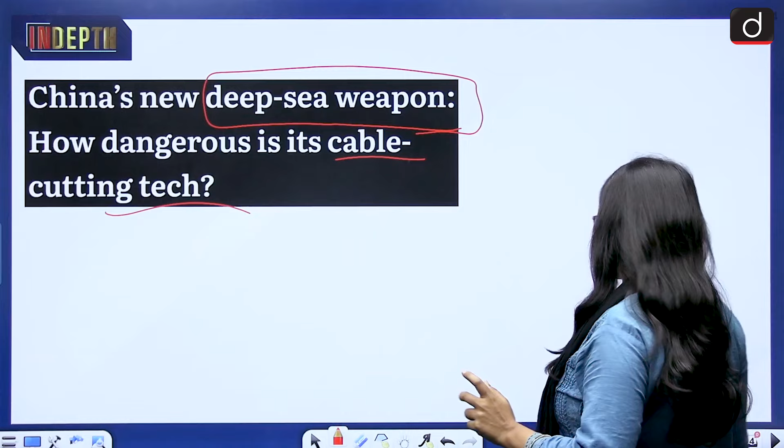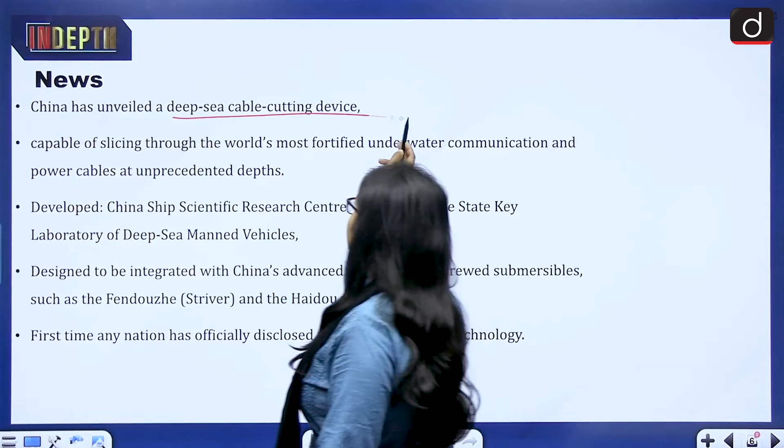News talks about China's new deep sea weapon, how dangerous its cable cutting technology is. So cable here does not mean normal cables, it means the cables which are lying deep under the sea, the deep sea cables, and this is how they look under the sea. So the news talks about China has unveiled a deep sea cable cutting device, which is capable of slicing through the world's most fortified underwater communication and power cables at unprecedented depths. And this unprecedented depth is around 2000 meters.

But this unique technology developed by China for cutting deep sea cables can work at a depth of around 4000 meters, which makes it even more deadly. The new technology has been developed by the China Ship Scientific Research Center and the State Key Laboratory of Deep Sea Manned Vehicles. It is designed to be integrated with China's advanced crewed and uncrewed submersibles, the submersibles which work at a great depth.

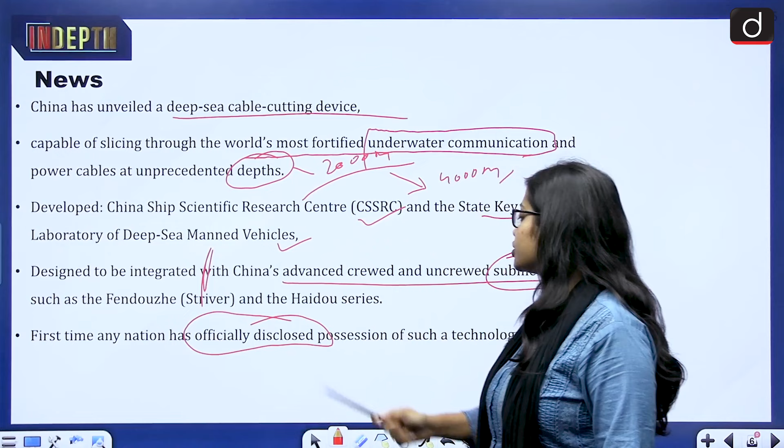Then this is the first time any nation has officially disclosed possession of such a technology. Now what can be asked in the examination is that China has become the first country to be able to develop the deep sea cable cutter. Also, you should know what are optical cables or optical fibers, from where the question can be asked in the examination.

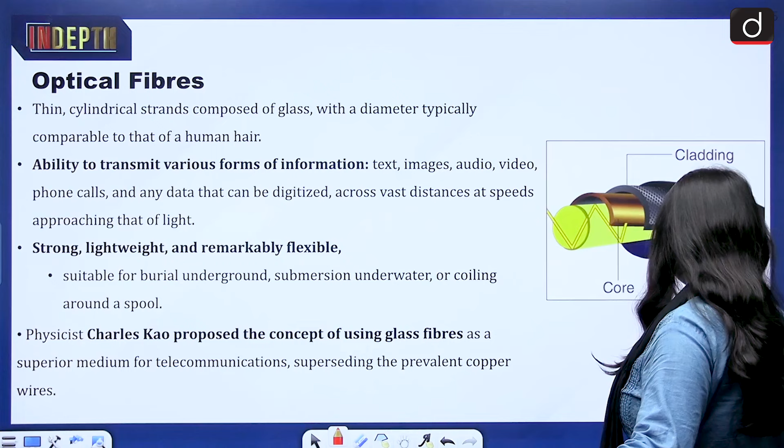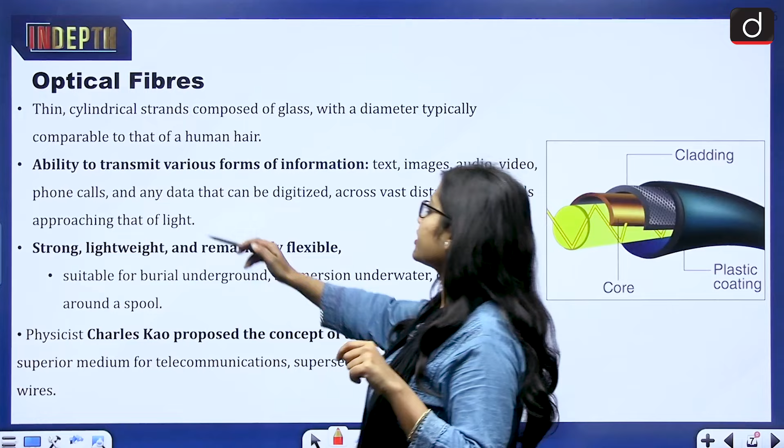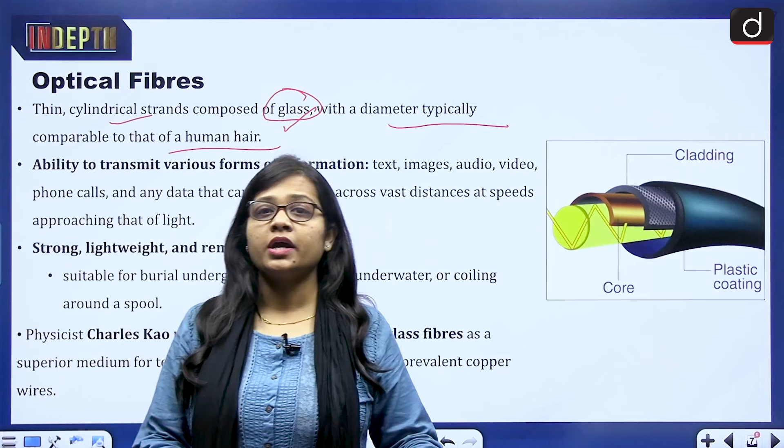Now what are optical fibers? Basically optical fibers are the element of which these deep sea cables are made. Optical fibers are very thin, cylindrical in nature, composed of glass with a diameter typically comparable to that of a human hair. It is very durable, and one of the benefits is that information can travel through it at a very high speed, like the speed of light, and the interference is very low because it is composed of glass, and glass is an insulator, so the chances of it getting damaged or electrified are very less. And look at this image, this is how our optical fiber looks.

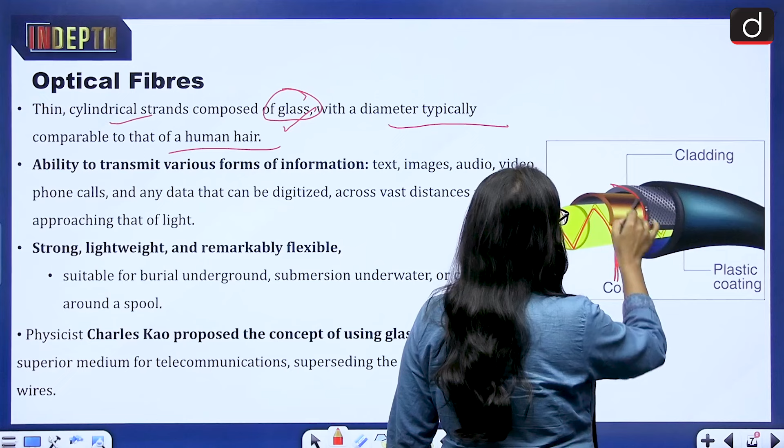This is the light which is traveling under it, then this is the core which is basically made up of glass, then you have a coating which is known as cladding, and then you have a coating outside it also, and it is very very safe in nature also. So it is thin, cylindrical, composed of glass, diameter comparable to that of a human hair.

Then it has the ability to transmit various forms of information. So various forms of information can travel through it. Information in the form of text, images, audio, video, phone calls, and any data that can be digitized across vast distances at speed like that of the speed of light. And that is why the optical fibers are so important.

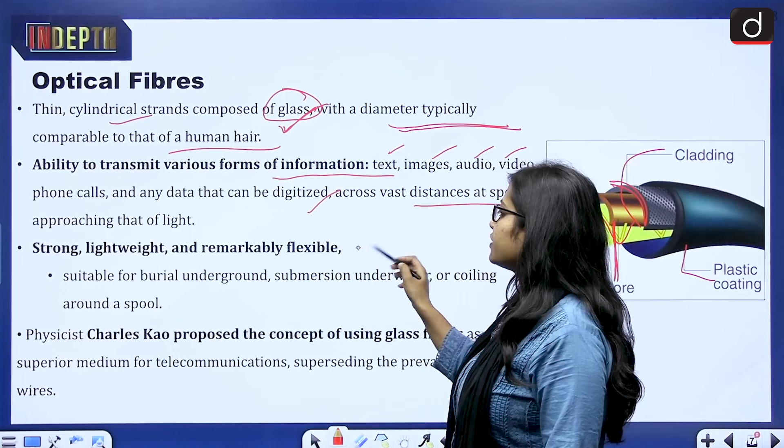And the information or the data transmission which takes place from one place to another place and across the continent also, more and more data transmission nowadays is being done through the optical fiber because of its high efficiency, low interference rate, and also the speed is very, very high. Then it is strong, lightweight, and very flexible in nature, very much suitable for underground, submersible, underwater, or coiling around a spool. So very, very safe also.

And the concept of the optical fiber or the glass fiber goes to physicist Charles Kao. So physicist Charles Kao proposed the concept of using a glass fiber as a superior medium for telecommunication from one place to another place. And for the proposal of using the glass fibers, he has won the Nobel Prize in Physics.

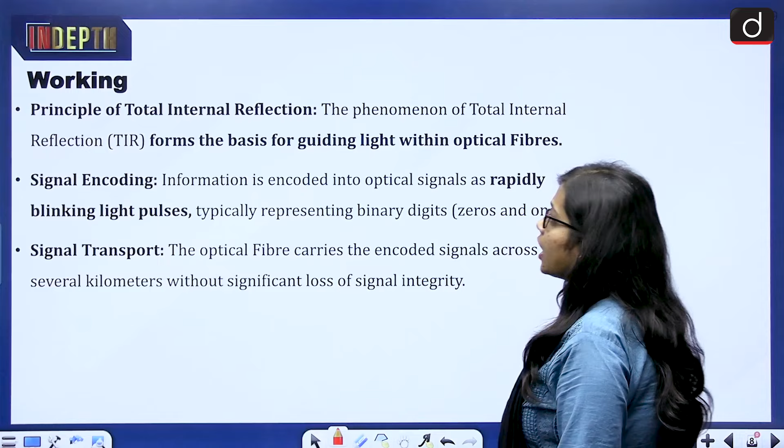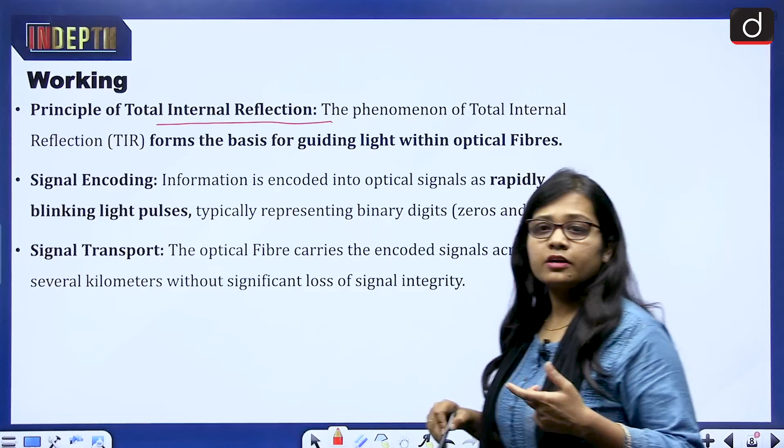Now how the optical fiber works, what is the principle on which the optical fiber works? So first and foremost, it is the principle of total internal reflection. So the phenomenon of total internal reflection forms the basis for guiding light within optical fibers. And when the light travels from a higher refractive index medium, like for example from the glass, to the lower refractive index medium, like for example the air, the light does not go out from the medium, it gets reflected back into the medium, and that is how the total internal reflection phenomenon works.

Then signal encoding. So the information is encoded into optical signals as rapidly blinking light pulses, typically representing binary digits. So the information, like for example, this is the first place and this is the second place. So from the first place, the message or the data can be encoded and then it travels towards the destination, and then here it can be decoded.

Then third is the signal transport. So the optical fiber carries the encoded signals across several kilometers without significant loss of signal integrity. This is in the form of high efficiency, high speed, low interference, because of the nature of the optical fiber.

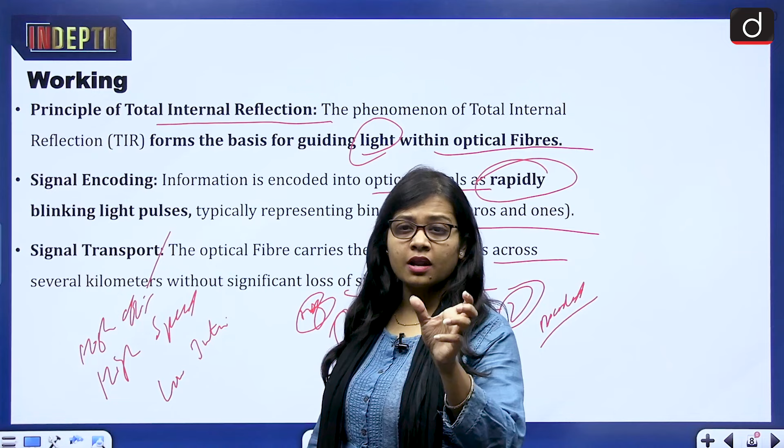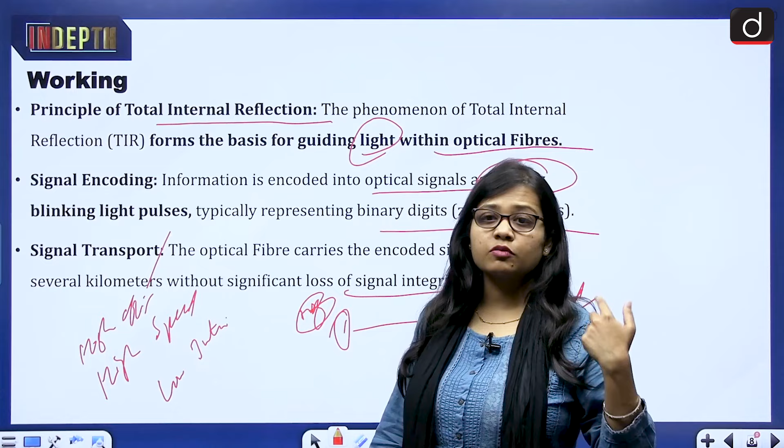And also the covering of the optical fiber is very, very high, because before the optical fiber, the data transmission was done through the copper wires, and in the copper wires the interference was very high, the disturbance was very high, the speed was low, and as compared to the previous copper wires, now the optical fiber wires are very, very useful.

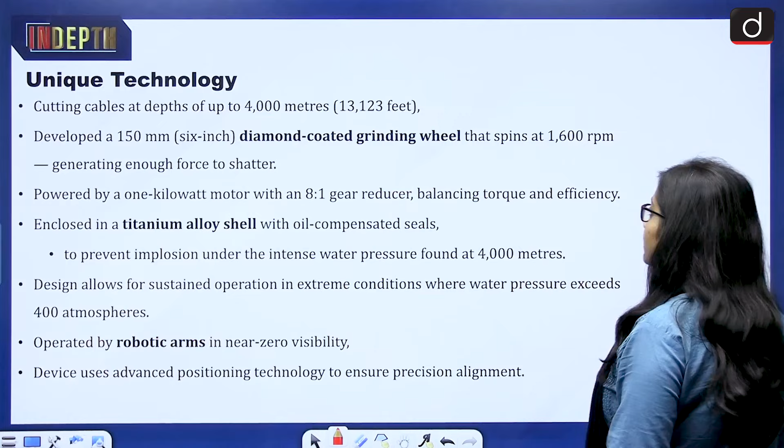So this was important to tell you, because by knowing about the optical fibers, how they work and what their benefits are, you will be able to understand why the technology, or the deep sea cable cutter which China has developed, becomes very, very harmful and concerning for the globe.

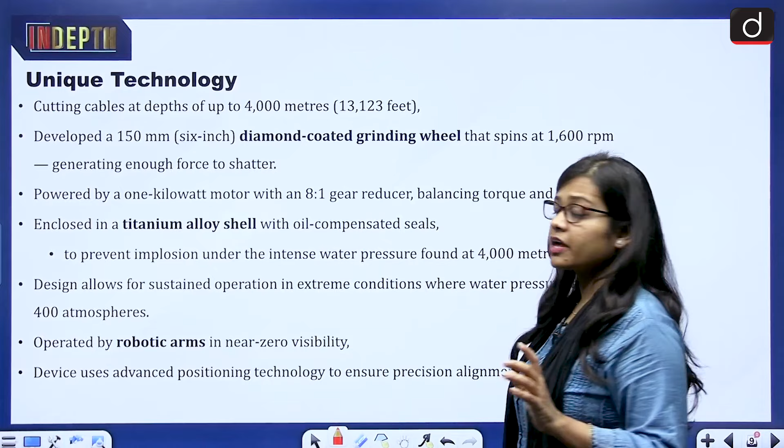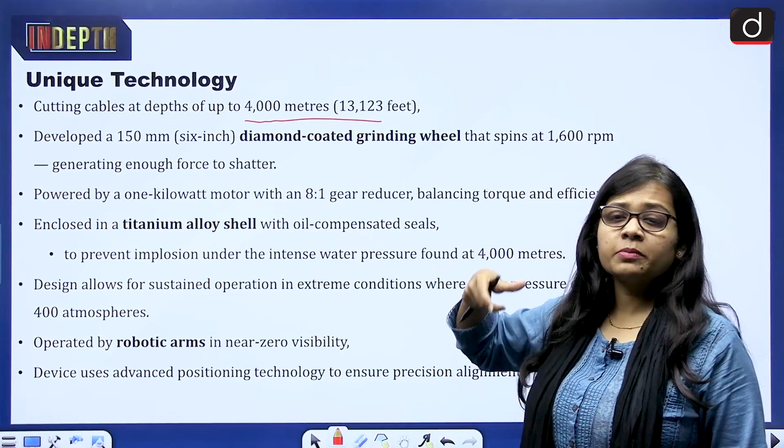Now about the unique technology which China has developed. So first and foremost, cutting cables at depths of up to 4,000 meters, and it is around twice the depth at which the deep sea cables are placed. So usually the deep sea cables are placed at a depth of 2,000 meters, but this deep sea cutter of China can work at a depth of 4,000 meters, and this adds to the concerns.

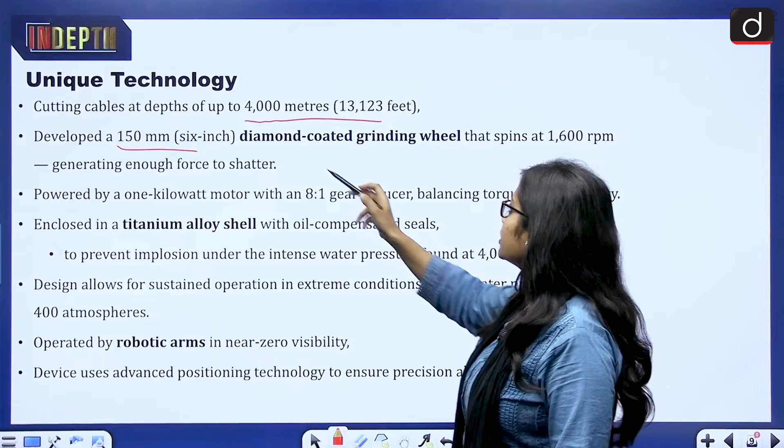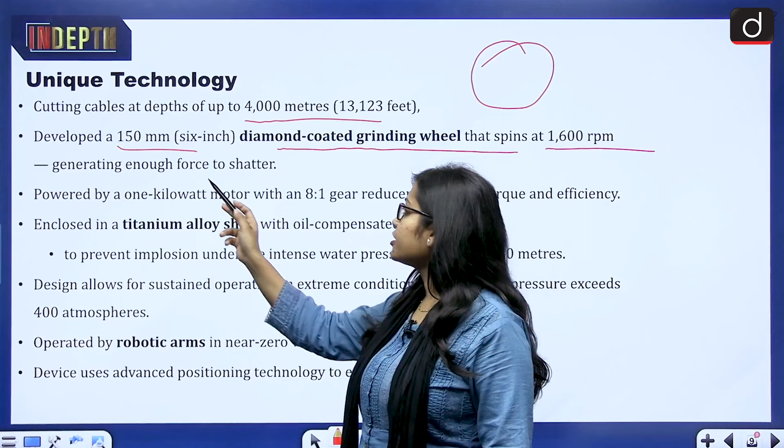Then it has been developed with a 150 mm, which is around 6-inch, diamond coated grinding wheel. So the cutter has a diamond coated grinding wheel. The wheel is coated by diamonds, and it spins at 1600 rpm, and this generates enough force and torque to shatter the coating of the optical fiber.

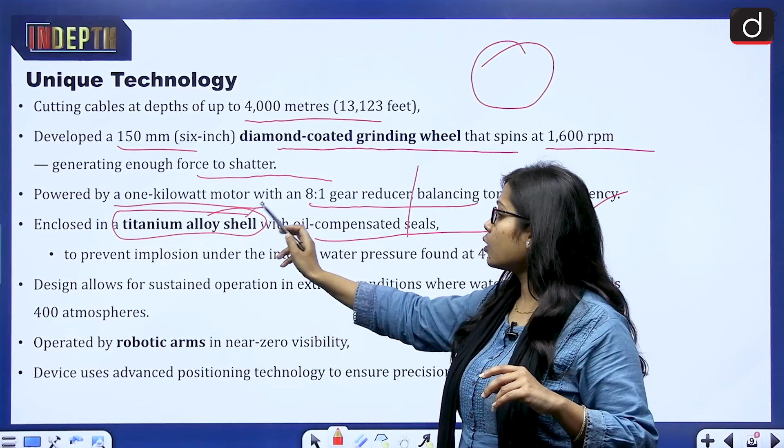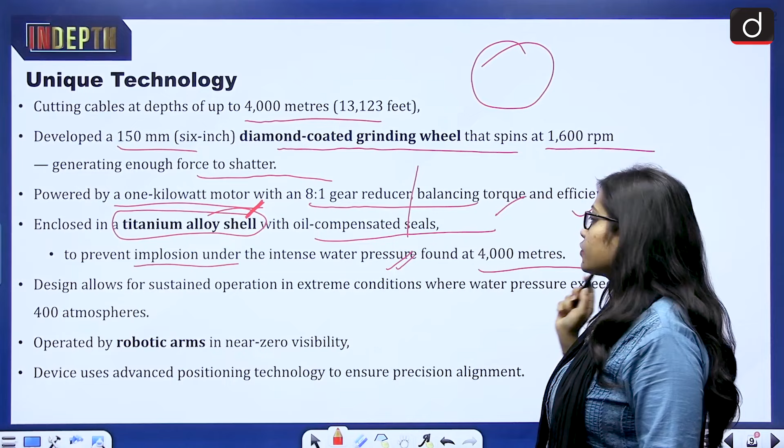And then it is powered by a 1 kilowatt motor with an 8:1 gear reducer, balancing torque and efficiency together. Then it is enclosed in a titanium alloy shell with oil compensated seals. Now the titanium alloy shell makes it even more durable in nature because it prevents implosion under the intense water pressure found at 4000 meters, and the titanium alloy shell prevents any kind of electrical explosion also. So the titanium shell gives it an insulation which prevents it from any kind of explosion.

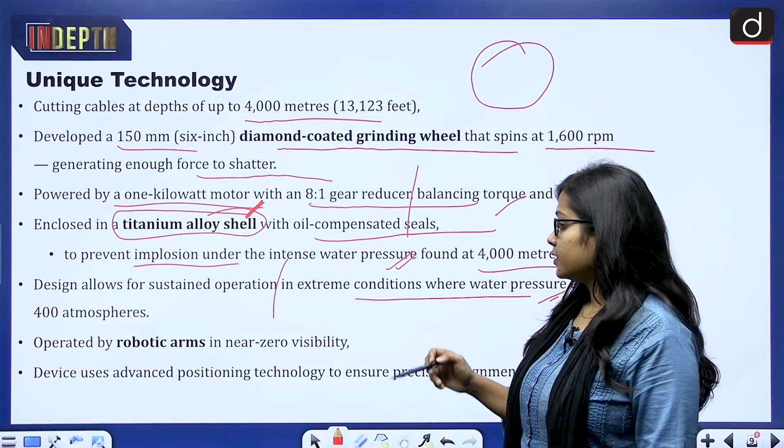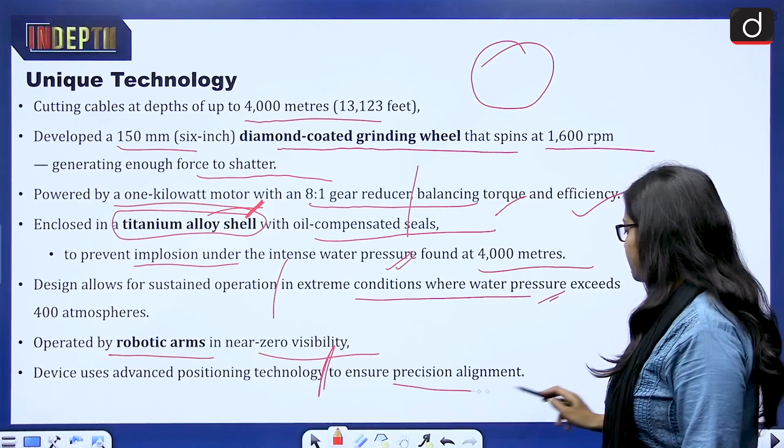Then the design allows for sustained operation in extreme conditions where water pressure exceeds 400 atmospheres. Then it is operated by robotic arms in near zero visibility. The device uses advanced positioning technology to ensure precision alignment. So the instruction that will be given can be performed with precision and at an efficient rate.

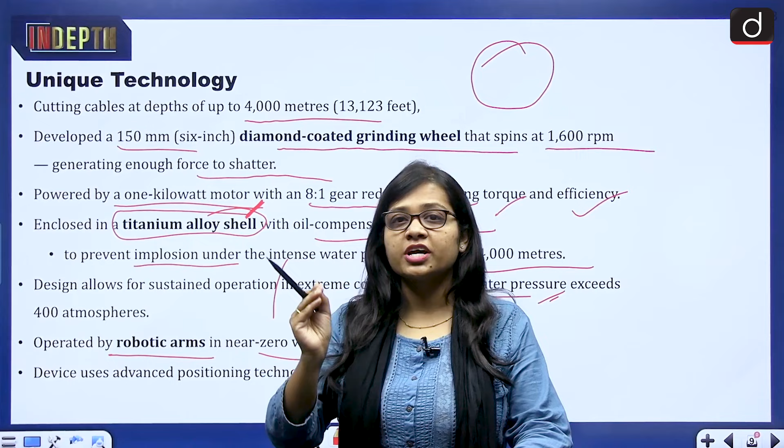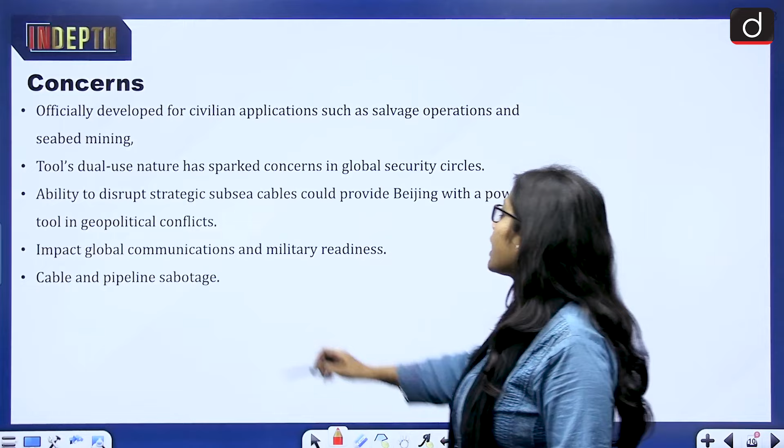Now, what are the concerns with regards to this cable cutter? It is officially developed for civilian applications such as salvage operations and seabed mining, but it is considered concerning with regards to defense and technology. Defense, because much secretive or official information should not be moved out or caught by some other country. These kinds of codes, encoding and decoding, are also done through the optical fibers, the underwater or deep sea cables.

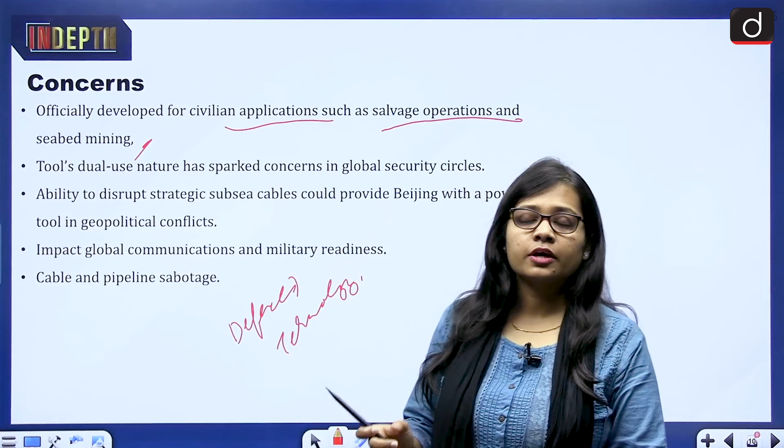But now with this cutter, this becomes difficult, because if the cutting of any cable is done by China, then the communication or transmission of information will become very difficult, and the sabotage of deep sea cables many a times comes into the picture. For example, Taiwan always comes up with the issue that China is sabotaging the deep sea cables in the South China Sea. Recently there was also an incident of sabotaging deep sea cables in the Baltic Sea, near the Nordic countries, involving Finland.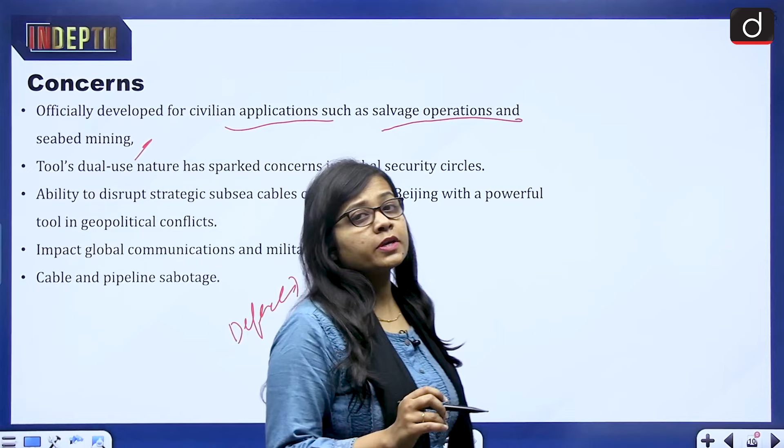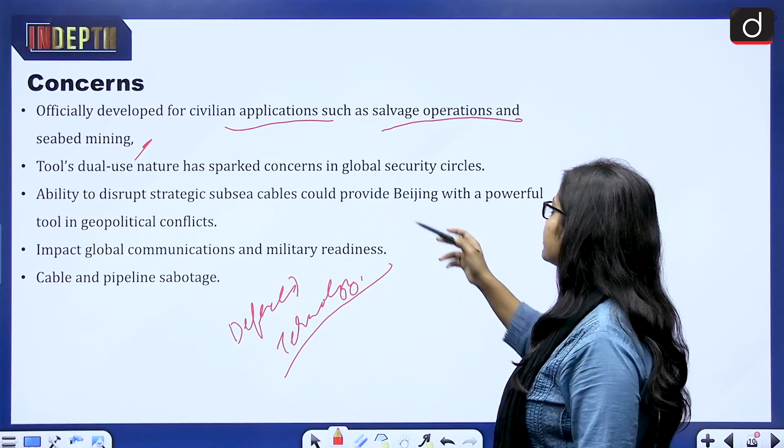Then with regards to technology and the transmission of information, internet transmission from one place to another is majorly done through optical fibers using deep sea cables. The global internet will be at greater risk if deep sea cables are cut. The tool's dual use nature has sparked concerns in global security circles, and the ability to disrupt strategic subsea cables could provide Beijing with a powerful tool in geopolitical conflicts.

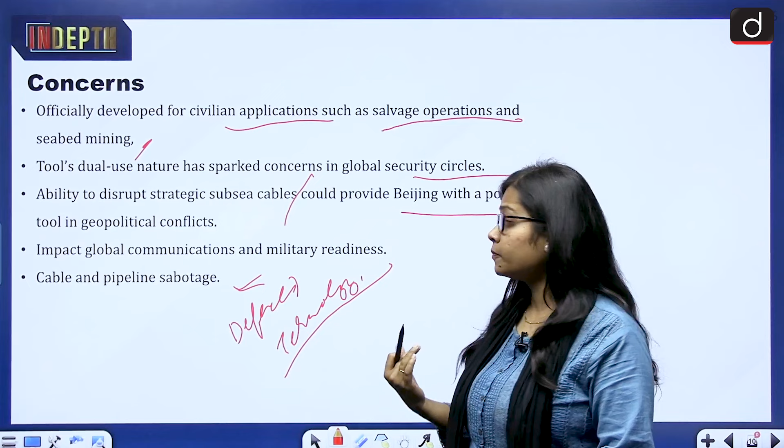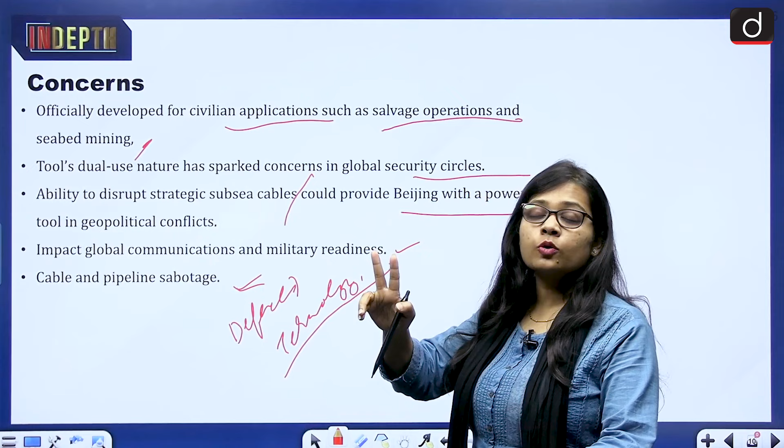Cable and pipeline sabotage news keeps on coming, as I just told you. This can impact global communications and military readiness. Global communications is important, the concern with regard to the global internet is important, and defense is important.

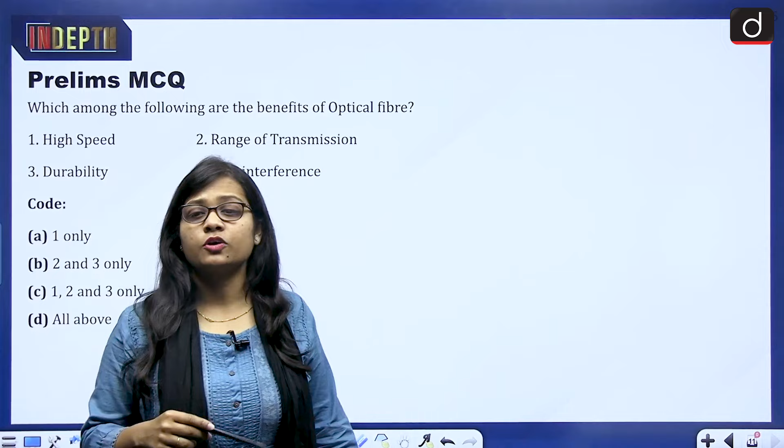And now in the end, the prelims MCQ, and like always, you will give me the answer in the comment section. The question is, which among the following are the benefits of optical fiber? High speed, range of transmission, durability, or less interference? We have discussed this, so I expect the right answer in the comment section. The codes are: 1 only, 2 and 3 only, 1, 2 and 3, or all of the above.